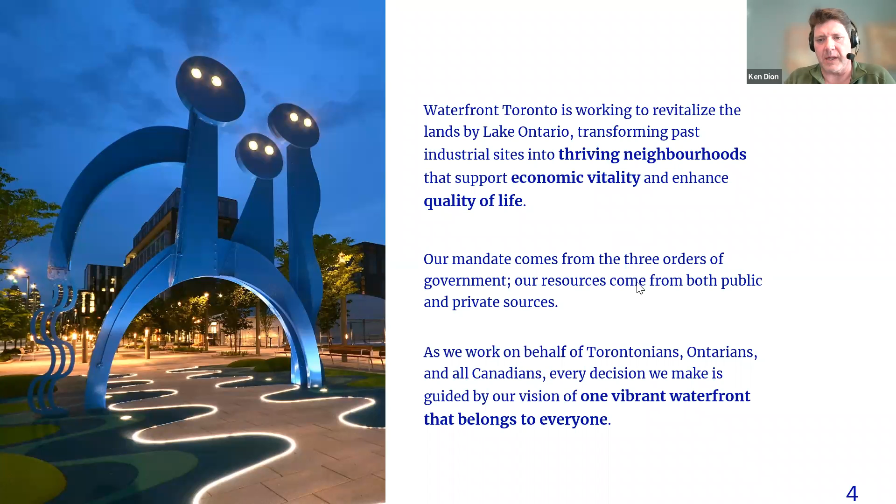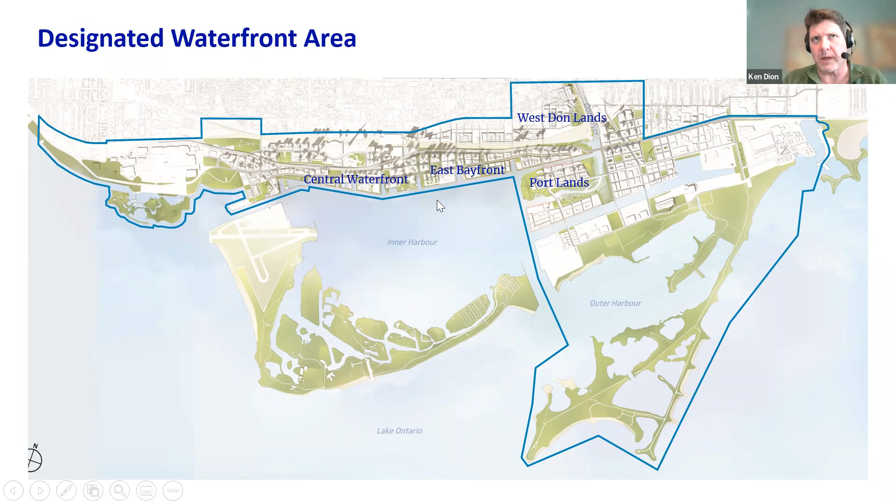We are working on behalf of Torontonians, Ontarians, and all Canadians to make a great, vibrant waterfront that belongs to everyone here in Toronto. This is our designated waterfront area. We also have a couple of projects working with TRC in the past, with Port Union and Mimico, but this is basically covering most of the inner harbor area, Portlands area, as well as going out to the west for the Toronto waterfront.

Some of the critical challenges and opportunities that Waterfront Toronto leads is looking to create sustainable, cutting-edge solutions to reduce carbon emissions, promote high quality of life, and basically to try to create healthy people living within the city. We are looking to create complete communities that address needs for housing, mobility, accessibility, connectivity, inclusivity. We try to create spectacular new destinations as part of our work, designed along vibrant cultural, recreational, ecological, civic, and public spaces.

And a core piece of our work involves extensive engagement with the public, stakeholders, First Nations, and developing a really integrated way to access the broader public.

We've had a significant amount of success. Over 2.5 million square feet of development has occurred, with over 2,600 market residential units. We have generated revenues to the government in the order of 1.6 billion, and created $4.1 billion worth of output to the Canadian economy. We've initiated $21 billion of total investment on the waterfront, as well as $2.6 billion development value attracted by Waterfront's first six projects in the area.

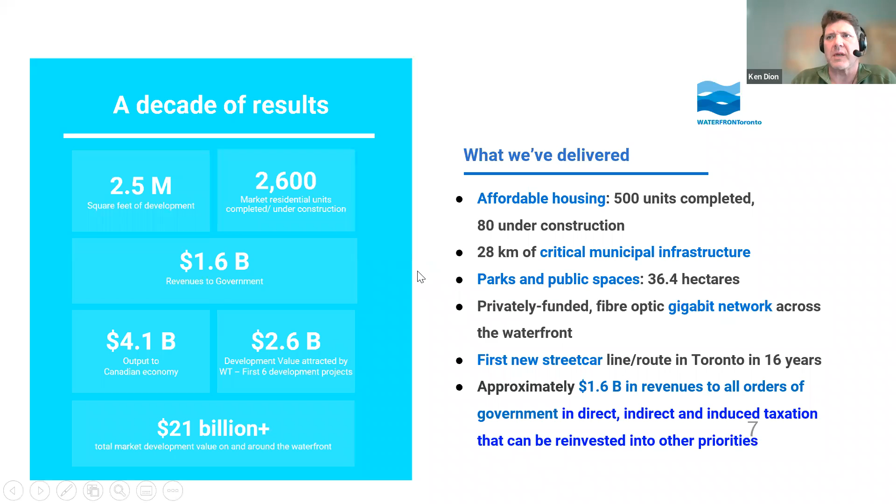So let's see if I can get this.

So getting into the project itself, the Portlands Flood Protection Project, project challenges and goal. We are located at the mouth of the Don watershed, which flows from the Oak Ridges Moraine down to Lake Ontario. It covers about 36,000 hectares, flowing 38 kilometers south, and is one of the most, if not the most, urbanized watersheds in Canada.

The project area is right at the mouth. The area in yellow is the location of our various project elements that we are in the process of implementing. You can see where the Don River comes underneath the Metrolinx GO train line, underneath the Gardiner ramps, Lakeshore Boulevard, before entering into the Keating Channel, which then does a hard right into the inner harbor of Toronto.

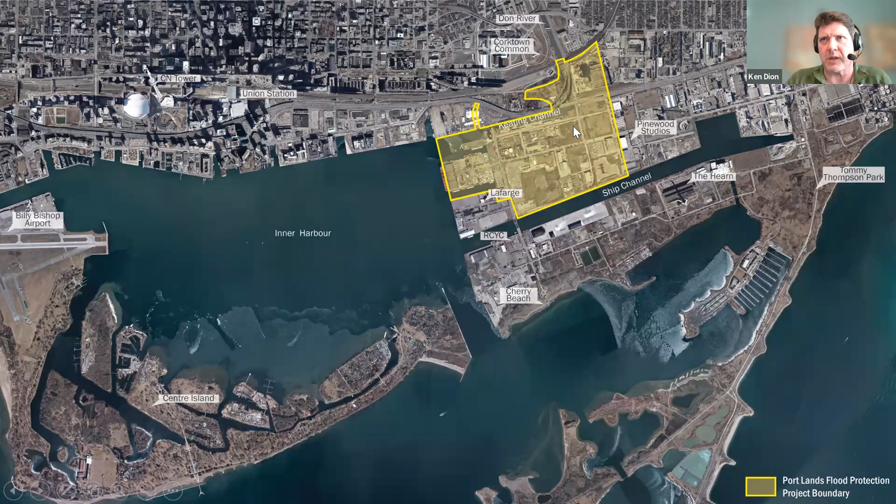So we are looking to provide major new flood protection and city building environmental enhancement works in this project area. Of course, this is not what has been here forever. This is all created lands that occurred over 110, 120 years ago. This was one of the larger coastal wetlands on Lake Ontario, Ashbridge's Bay Marsh.

And as an effort to address disease, when they had raw sewage being discharged into the wetlands and a lot of mosquito-borne disease, but also they wanted to create a whole new industrial port operations area at the time, extensive filling operations were undertaken over a period of 10, 15 years to transform the marshes into the Portlands that we see today.

Of course, it was not the environmental rules those days that we have now, and it was a significant amount of garbage and waste materials that was contributing to the creation of the land base at that time, creating a legacy of impacts.

After the Portlands were created, there was a significant—I apologize for the phone in the background.

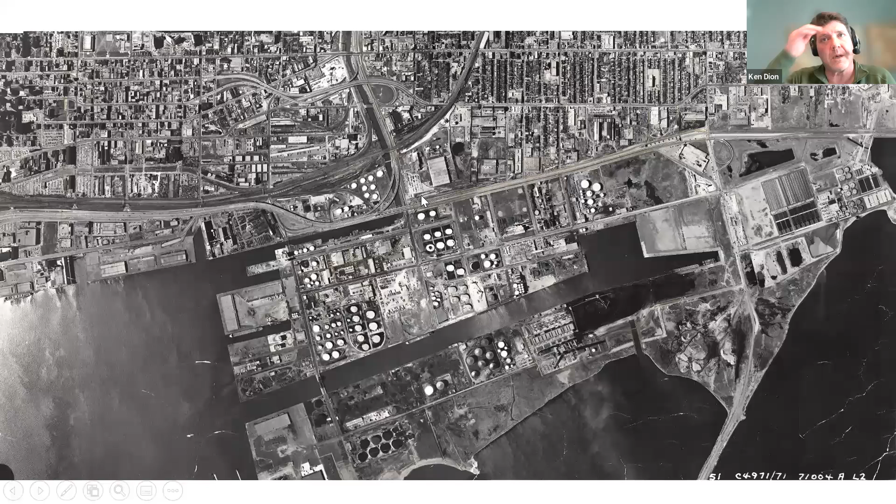You can see there's a legacy of industrial activities that occurred. Oil refinery was extensive in the area, and as were munitions production and tanneries, and a series of other activities that created significant further contamination to the soils that were placed in the Portlands in the day.

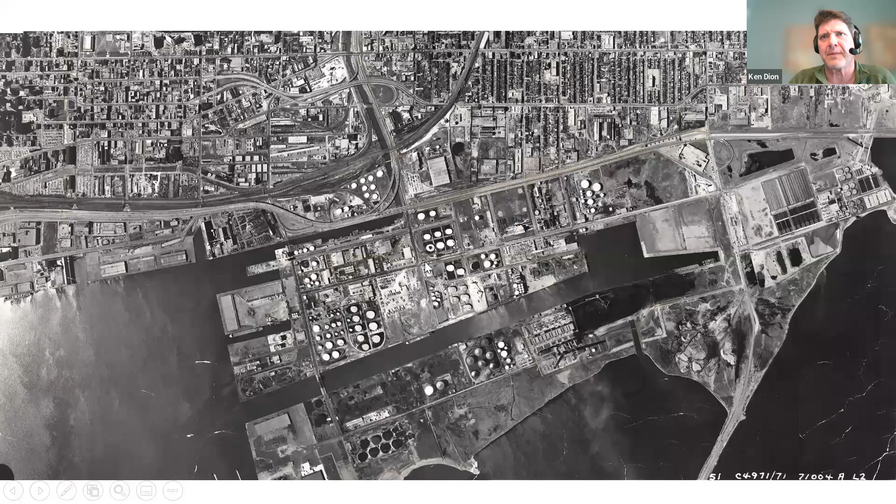And as a result of this lake filling activities, what happened was we ended up with a very low lying topography surrounding the Don River and Keating Channel that basically created a very flood vulnerable location within the broader surrounding area on the Toronto waterfront. What you see on the left was 210 hectares of flood vulnerable land that was originally on the west side of the Don River.

Flood protection works were completed between Waterfront Toronto, TRC, and the City of Toronto by 2012 through the West Don Lands and the lengthening of a railway bridge that actually eliminated the flood risk. We are now working to eliminate the remaining 290 hectares of flood risk that occurs to the east and south of the Don River through the implementation of the Portlands Flood Protection Project.

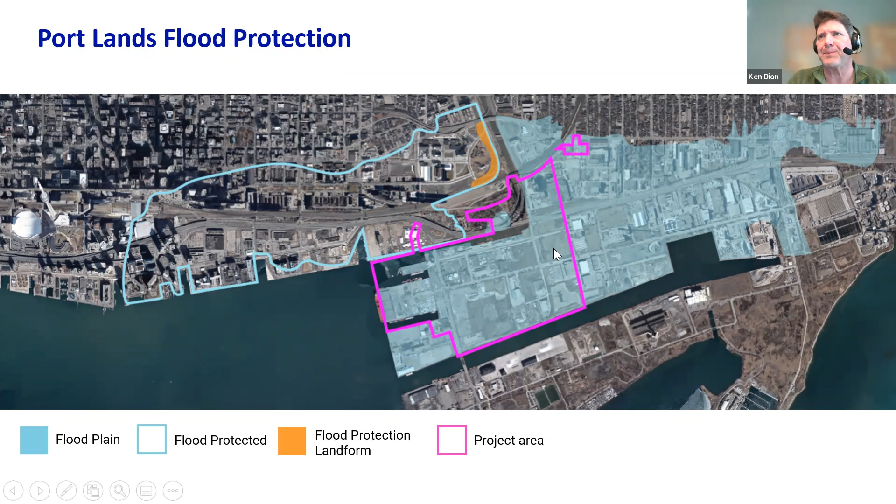So this is the more detailed sort of residual flooding, the flood risk that is expressed within this area, that will be addressed through the Portlands project.

We are dealing with regulatory storm flows, which in Ontario involves the highest flood on record, the largest volume of flooding that has occurred on record. For the Toronto area, Hurricane Hazel was the regulatory flood event, a massive flood event far larger than the 1-in-100-year storm event.

To give an idea of the range of flows we're dealing with, the Don River in a typical summer is around 2 to 4 cubic meters per second. The regulatory storm event we're trying to provide accommodation for is 1,572 cubic meters per second, so it's a much larger volume of water. The 100-year storm is about 500 cubic meters per second, to give you an idea of the quantities we're managing.

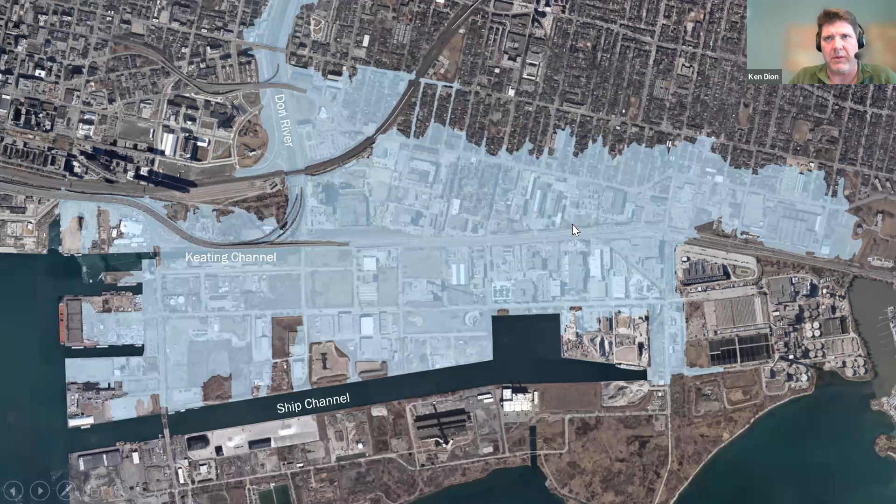Another major issue we're dealing with is the significant amount of sedimentation and debris in the Don. It's always been known as a very sediment-laden river. It comes through large bluffs upstream, and with industrialization and urbanization upstream, a significant amount of sediment and debris comes down. We're looking at 30 to 40,000 cubic meters of sediment deposited in the Keating Channel every year. That material won't disappear once we implement the project, so we have to continue an adaptive management approach for dealing with the sediment.

We get 600 to 800 tonnes of floating debris coming down from upstream, which is important to manage so we don't have impacts and conflicts with navigation in the inner harbor, and also because we're looking to create a very green and naturalized river mouth. We want to minimize the amount of refuse that gets trapped within our naturalized areas.

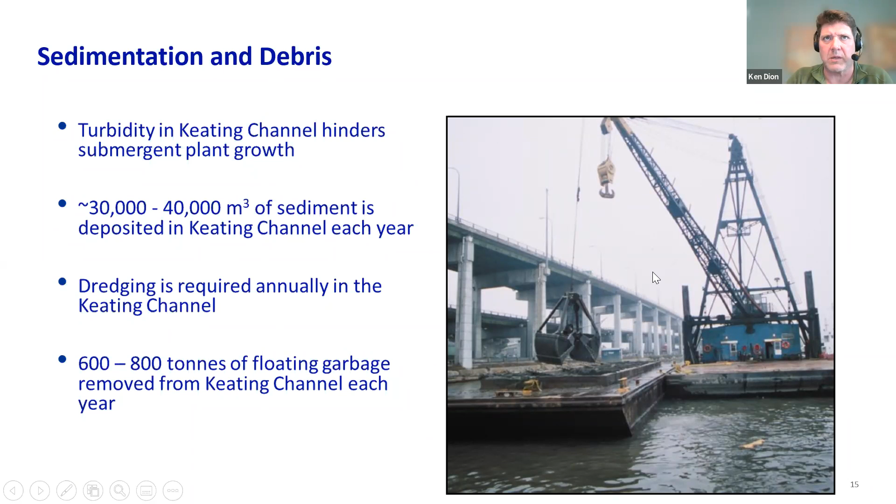The habitat conditions currently are very poor. It's all dock walls going several kilometers upstream. The Keating Channel has deep, uniform conditions, up to 6 to 7 meters deep, with very little structural habitat within the Keating Channel and Lower Don. There's essentially no riparian vegetation. As you can see in the foreground, given certain summer conditions, we can get poor water quality with low oxygen levels and high phosphorus, creating significant filamentous algae blooms. The fish communities and diversity of wildlife are quite low right around the Keating Channel itself.

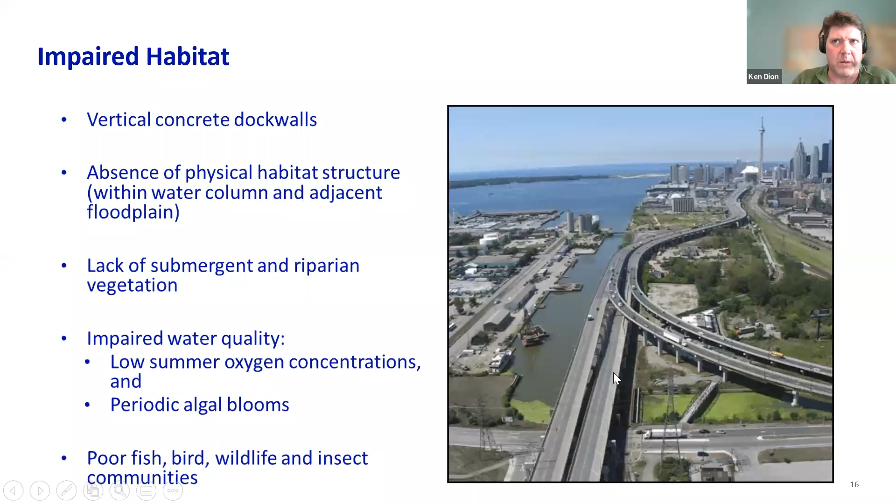So we undertook an environmental assessment, completed in 2015, which sought to select the best solution to create a naturalized river mouth while providing flood protection up to and above the regulatory storm event, within the context of being in Canada's largest city. We had to deal with existing infrastructure, existing land uses in the area, and plan for future revitalized, sustainable communities as well.

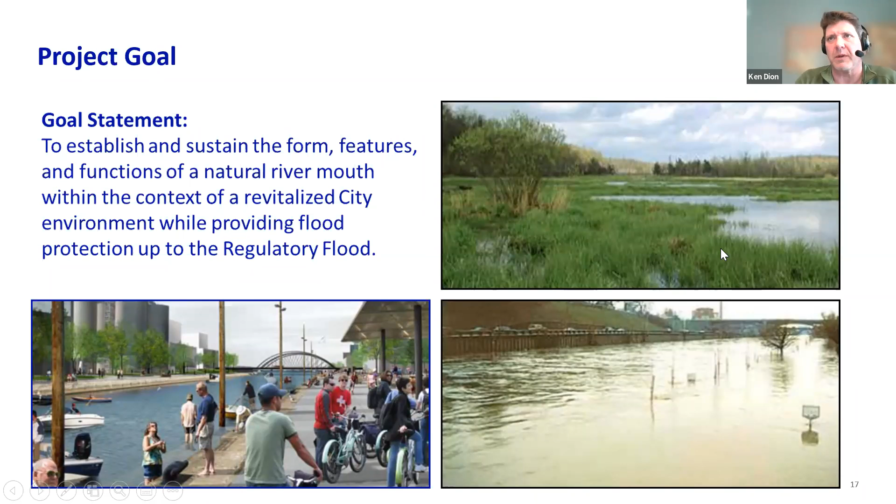Through the EA process, we create a new naturalized river mouth with 3 different outlets to allow floodwaters to find their way into Lake Ontario. We're keeping the Keating Channel, which is deep and wide and offers significant flood conveyance capacity. It also provides a great opportunity in a sustainable revitalized community for formalized public promenades that allow public access, cafes, and different opportunities for the public to experience the dock walls.

We're also creating, through a combination of cutting a new river valley system and raising the surrounding lands, a new naturalized meandering river system with associated wetlands behind the levees, and a whole network of trail systems allowing the public to experience nature in the river being created. This will take the base flow conditions most of the time. We're putting in a flow curtain at this location that diverts most of the base flows into the river, so fish know which way to move upstream during their migrations.

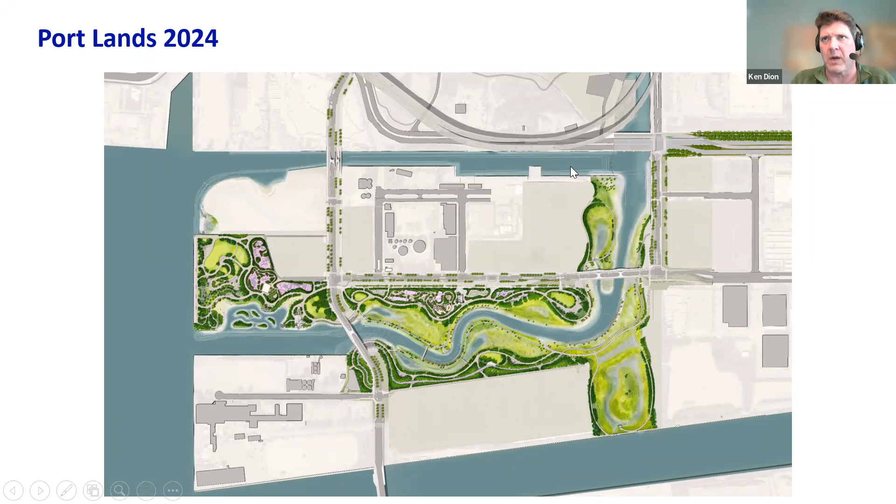To deal with sediment, we are creating a sediment trap north of Lakeshore. We have to widen and deepen the river north of Lakeshore to get underneath the Lakeshore bridges, and as soon as we do that, sediment deposits in that location. So we need a new system for dredging and removing sediment north of Lakeshore to retain conveyance capacity under the bridge. We are developing a detailed operational plan for managing sediment there as our primary location, rather than in the Keating Channel where it is currently undertaken.

What you see here is one project, but it consists of about 23 other major projects broken into various types of works.

We have park works, shown in green, creating areas of parks and open spaces. We also have bridges, shown in pink. We are creating islands as part of the new river design, so we have to install a whole series of new bridges, raising the grades leading to them on the surrounding lands and islands. This requires new roads and all the associated municipal servicing and infrastructure, along with the new river system itself.

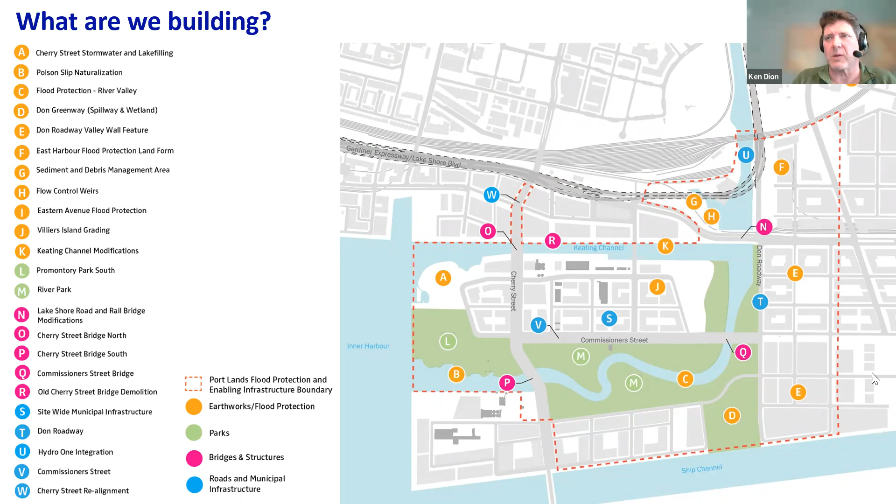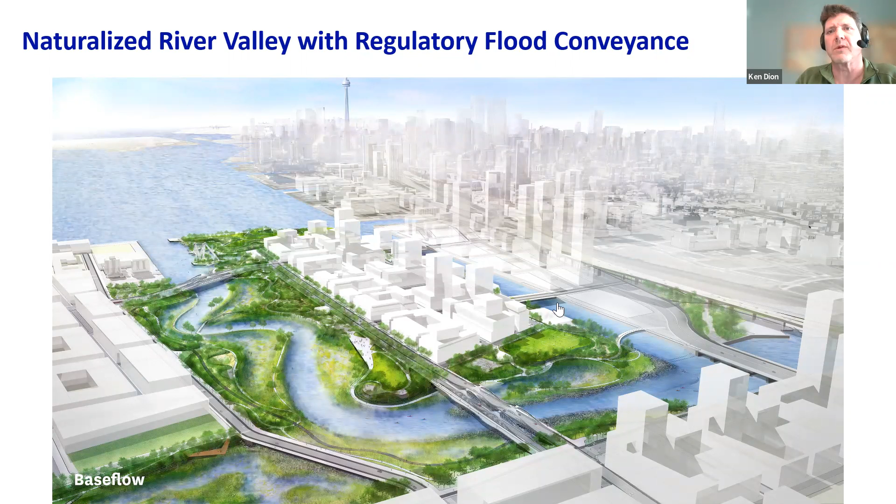We also have a series of marine structures, such as the sediment management area, flow curtains, and a flood protection landform along the Don Roadway south of Lakeshore, allowing us to contain and convey regulatory flows into the lake so they don't spill into surrounding future development areas. The idea is to have, most of the time, a green and blue naturalized river and wetland system. But under flood events, the water levels use the green infrastructure as the conveyance area, and as the flood hydrograph passes, we're left with the green spaces needing only relatively minor maintenance, like cleaning sand and debris off the park and river spaces, while still providing conveyance during a regulatory storm.

There are a lot of benefits from this project. It's a $1.3 billion project, but we're adding $5.1 billion in value to the Canadian economy, generating significant government revenue through direct and indirect development opportunities in the area. There's a lot of employment from the work itself and the subsequent development that will follow. We're looking to significantly increase the number of people living in the area, with a significant amount of affordable units. We're creating 11 hectares of parkland and 13 hectares of coastal wetlands, a huge increase in biodiversity and public green space, creating a new paradigm for sustainable and accessible communities.

Some technical challenges worth noting: this is a lake fill area that's heterogeneous, unconsolidated, and underlain by peats, making it very compressible, unstable, and contaminated. This created significant challenges in excavating a river valley essentially at Lake Ontario water levels with high groundwater conditions, in order to build a clean, green naturalized wetland on top.

So one of the things we had to do was create a lot of isolation, building a really big foundation and basement for the natural river system through heavy engineering processes, including a series of cutoff walls. These ensure our valley slopes never collapse into the future surrounding areas, and also allow us to excavate and dewater the river valley system while constructing in the dry. This let us create horizontal and vertical barriers against contaminants left behind in the future development blocks and beneath the river valley, so we're not creating pathways of contamination into the ecosystems.

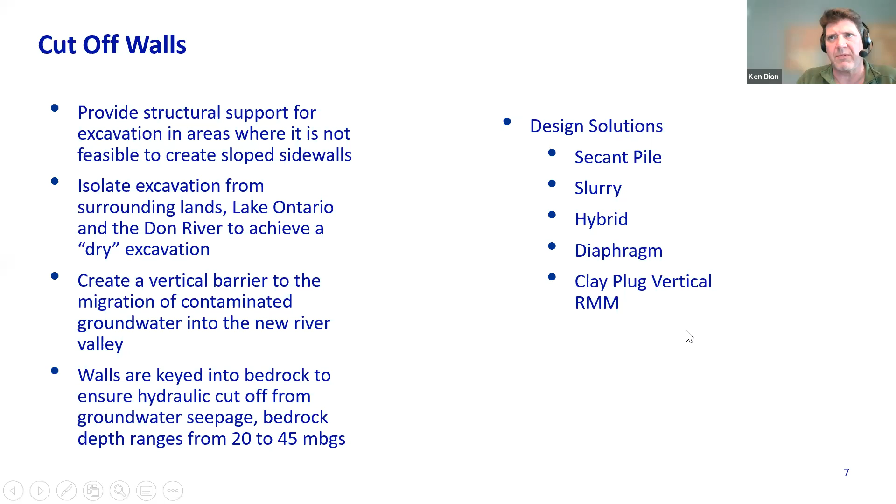We had different types of solutions: secant piles, slurry walls, a hybrid of slurry walls, and diaphragm walls incorporated into the overall design. Depending on the location, the physical conditions varied based on depth to bedrock, the complexity of the soils, and the importance of isolating structural components. We used various templates of these different reinforcement types depending on the geography of the project.

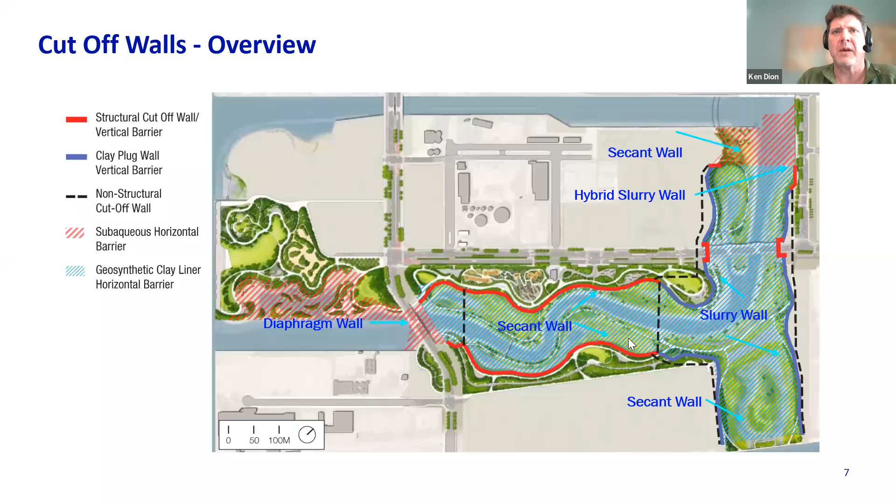One of the big ones, and some of the first work we did, was secant piles. These are basically 1.5 meter diameter vertical concrete piles that overlap by 25% on either side of each other, and every second secant pile has a steel H pile driven down to bedrock. These range from 20 to 45 meters in depth depending on where bedrock was. This allowed us to create an impervious barrier from the adjacent lands that aren't going to be part of the river, so contaminated groundwater can't migrate into the excavation site.

These were self-reinforcing walls that allowed us to drop the river valley by 8 or 9 meters inside, to remove the contaminated soils where we'll be creating the river valley system.

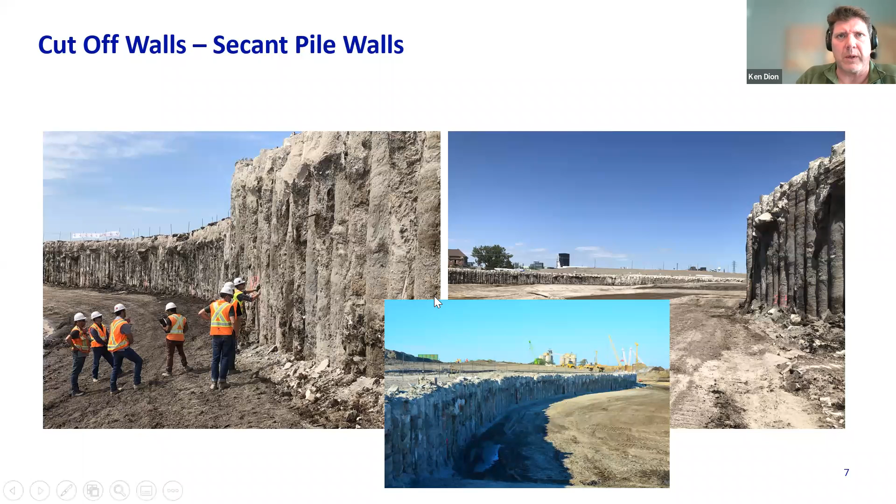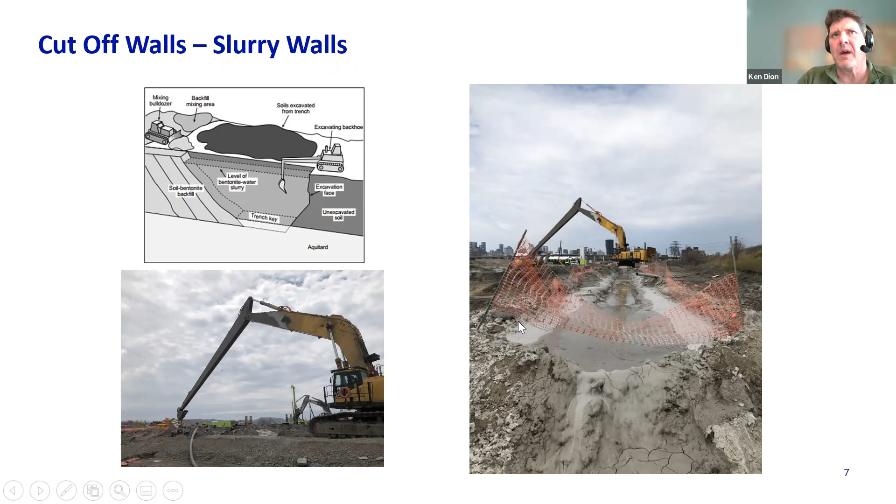In some other areas, we needed a temporary wall and barrier but didn't need a structural component. We used a technology called a slurry wall, which basically had a long-reach excavator digging a long trench. At the same time, we injected bentonite and concrete into the trench, and with the mixture of groundwater conditions and bentonite, it allowed us to create an impervious wall so we could dewater the excavated area where we didn't need structural integrity. That worked out quite well for us.

In some locations, we did the slurry wall but also needed a structural component, so we integrated it with a hybrid of steel H piles to give it some level of reinforcement to maintain the barriers.

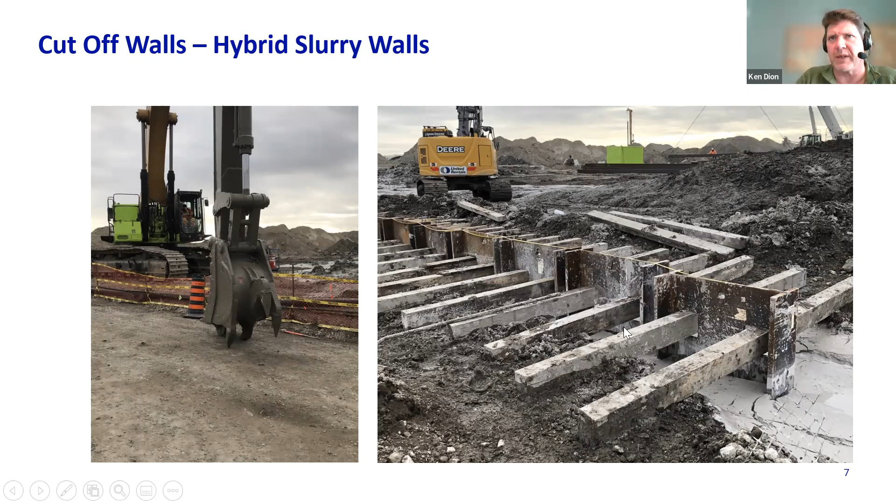A unique piece of work we had to do is where the river will be discharging, at the new naturalized area over at Polson Slip near Cherry Street—the site of the old T&T grocery store, if you know the Toronto Portlands area. This was unique: we needed to create a barrier that allowed us to excavate the river mouth in this location, but also excavate on the wet, lake side of it before doing the naturalization side, so we could put in a new bridge going into the slip.

So we needed a barrier able to withstand the loadings of the soils left to the east of it while we excavated to the west to allow for the bridge. But it also needed to be strong enough to withstand the loadings from the lake afterward, once we removed the soils to finish the excavation to the east, so it was a completely supporting structure.

We had an interesting piece of infrastructure equipment that came in and created a series of deep excavations where material was dug out. We placed in a steel cage reinforcement, then filled it with concrete to create the stability required for the different forces that will be exerted on it.

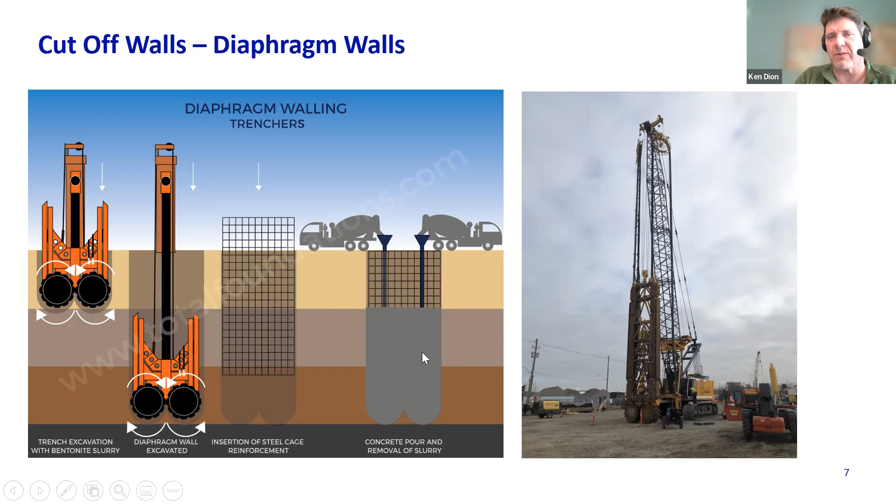When we're completed with this, and need to open up the river mouth entirely after the river has been finished, we'll bring in big diamond saws that will let us cut out chunks of the concrete and reinforced steel to provide that connection. Of course, we'd have to raise the water levels into the river first before opening it up, otherwise we'd get a flood wave of water from the lake entering in an uncontrolled fashion. So we need to create equilibrium there first.

Water management was important. Even though we were able to isolate the excavation, there's still a lot of water that comes up from local sources, from rainfall and snow, as well as seeping up through the bottom. So we needed to dewater and clean up the contaminated water before discharging it back into Lake Ontario.

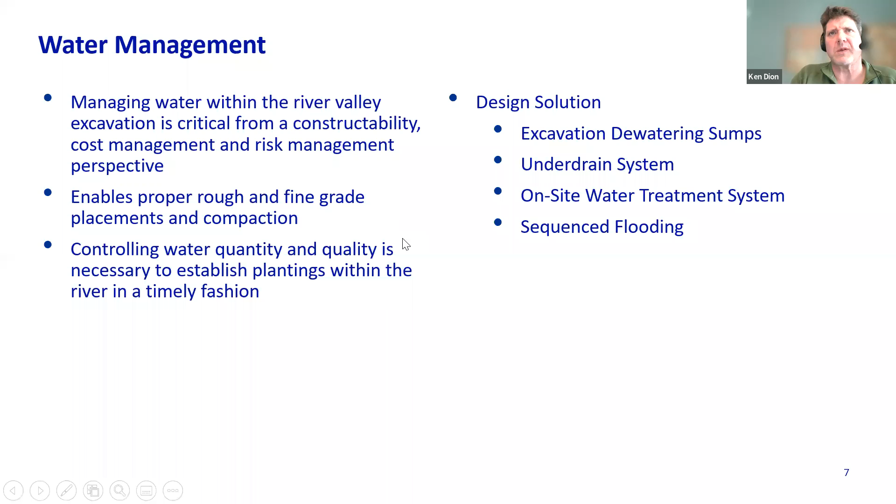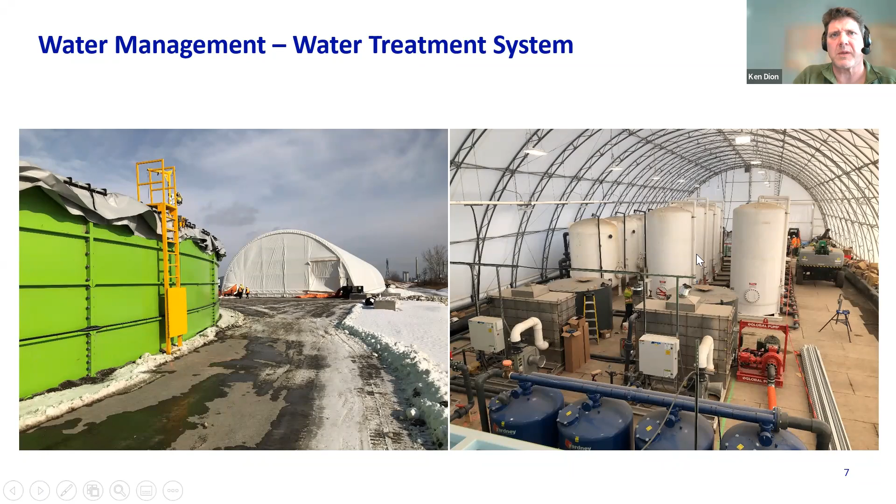So that dealt with the vertical barriers as well as the water treatment process. What we had to do as well was create a horizontal barrier. We had a series of risk management measures required to create a physical barrier between the remaining contaminated soils and groundwater below the river valley excavation area. Then we placed overlying fills for rough grading, and then finer soils for the various ecological units we wanted to bring in, as well as the components of the levees, the river valley, and the vegetation forming the overall program.

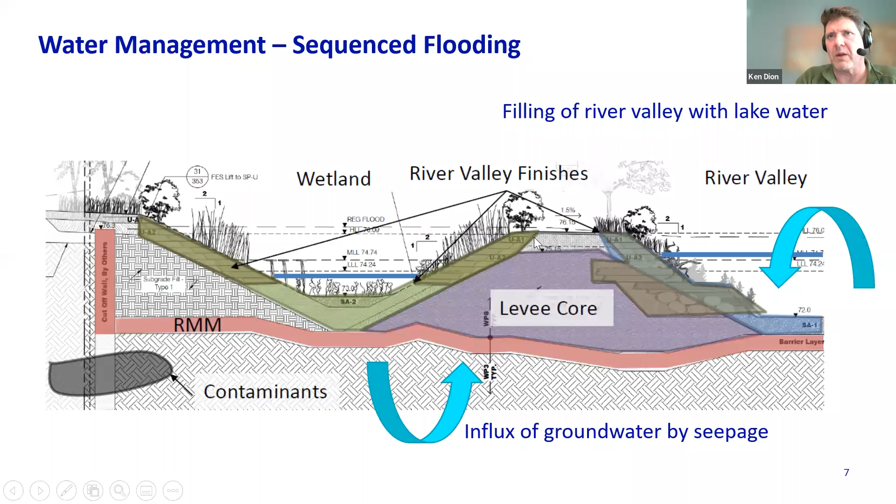So we do remove 1.5 million cubic meters as part of the excavation. It's all impacted, so we were looking to find ways to remediate or relocate for final use as much as possible, rather than disposing, digging, and dumping.

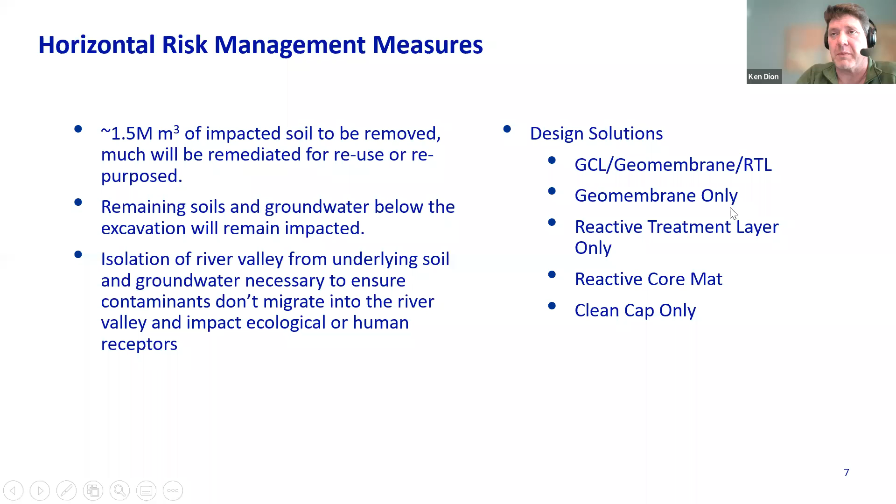We had the need to create a series of different solutions for the horizontal barriers before we start putting in the rough grading. You can see we had a series of different design solutions with GCLs, geomembranes, reactive treatment layers, reactive core mats, and clean caps, depending on the level of contamination of the groundwater and the soils within the area, as well as the expected range of shear stresses that would be exerted on the bed above under a major flood event. That will determine how much protection we needed to put in place.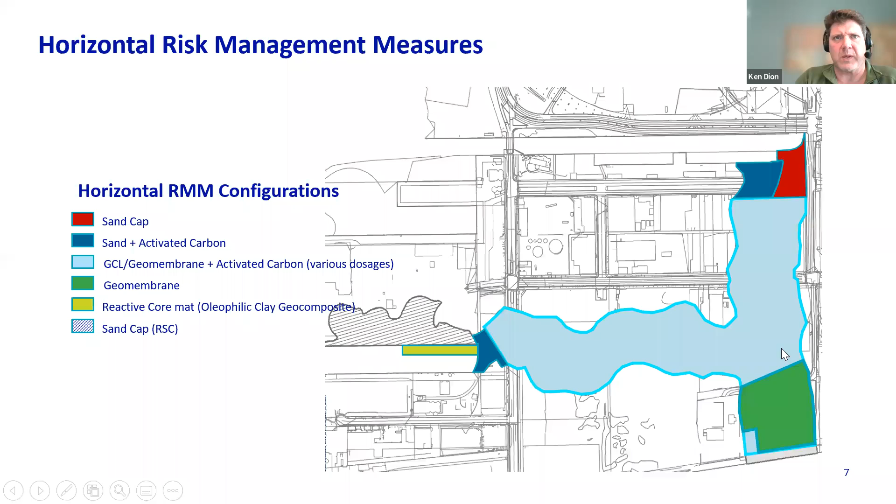So for the most part, the main part of the river valley had the most complicated GCL, geomembrane, and activated carbon treatments. Some of our cleaner areas, a new area we're creating called Canoe Cove, had much less contaminated soils, so we're just dealing with sand caps. And some areas we're just dealing with the geomembrane based on the anticipated conditions.

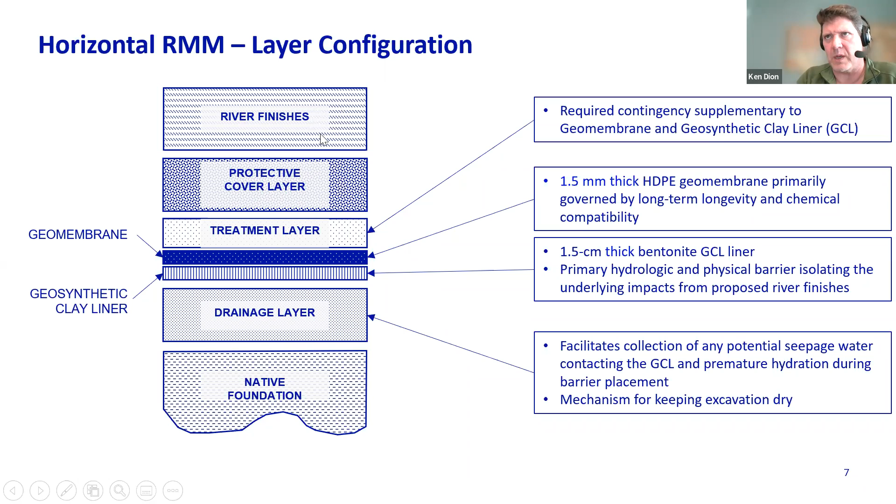So you can see how we would have the native foundation, then our drainage layer to facilitate seepage of water during the dewatering and maintenance process. Then we would come in with the geosynthetic clay liner, then the geomembrane, followed by an activated treatment layer. And then we'd have the various protective layers of rough grading and different materials that provide physical protection against scour, followed by our different soils, topsoils, and vegetation treatments of the naturalized area.

This gives you an idea of some of the geomembranes we were applying. We basically gift wrapped the entire underlie of the river valley system, and then overtopped it with the reactive layer to deal with any contaminants that might get through the underlying treatment layers before reaching the protective layers.

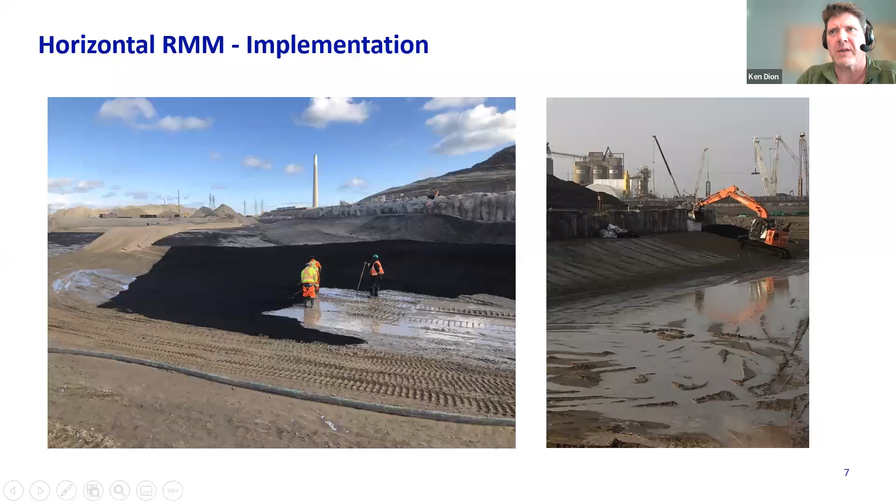As you can see, this was earlier last year, the main river valley excavation and the wetland areas and the various locations where the RMM, the risk management measures, are in progress.

How do you develop all this work? We had a very detailed risk assessment and characterization process undertaken using community-based risk assessment that allowed us to consider all the different properties within the Port Lands as a single site. It did allow us to characterize risks based on a property level, but allowed us to move soils from property to property based on like-for-like conditions within that area. So it provided quite a bit of flexibility to look at things comprehensively rather than a site-specific risk assessment, which would have been very challenging given the complexity of the multiple ownerships in the area.

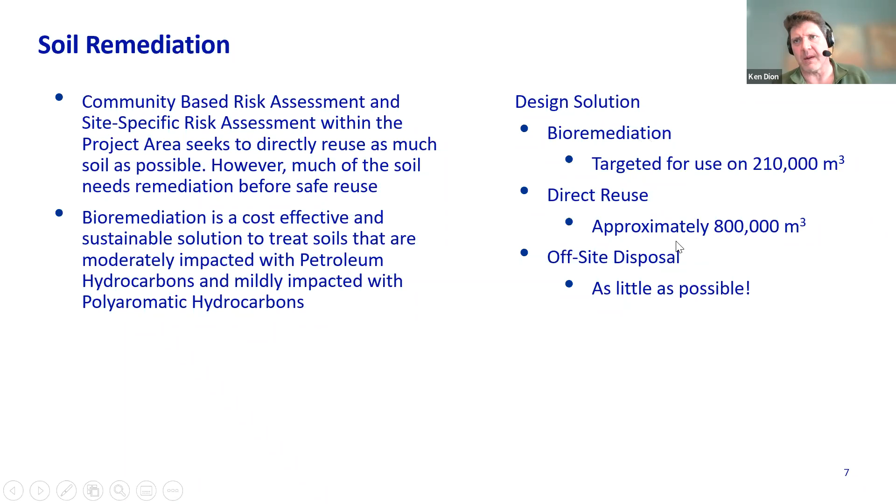We also ended up doing a lot of bioremediation on site with very long biopiles with additives to accelerate the breakdown of hydrocarbons that were within the soils. We were looking at 210,000 cubic meters through bioremediation. A lot of the soils we were able to move to future locations for direct placement, 800,000 cubic meters. And out of that, we do have a significant amount of offsite disposal still, but it greatly reduced compared to the 1.5 million cubic meters of soils being removed. A lot of that, of course, is rubble, refuse, contaminated peats that was not possible to reuse.

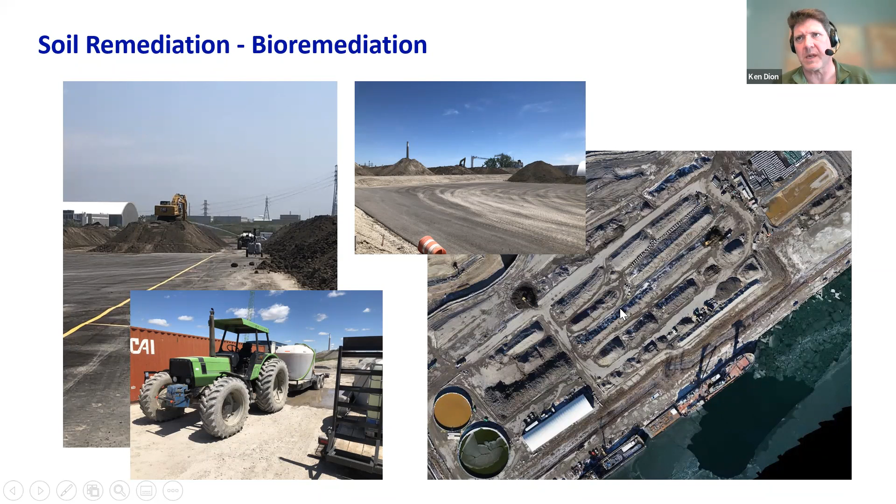So as you can see, this is the bioremediation. We created very long piles where we had excavators going out daily, turning the soils over, maximizing oxygenation with bacterial supplements to accelerate the breakdown of hydrocarbons for reused materials.

And of course, with the soils being heterogeneous fill, we had significant instability that we had to take into consideration. It was very geotechnically poor conditions, so we had a range of different approaches to deal with the geotechnical conditions.

We surcharged, basically put extra piles of dirt in areas to allow it to compress for a long period of time before we remove the extra material for the final grades. Where we didn't have the luxury of time, we created a foundation called rigid inclusions to underlie roads and other infrastructure, with caissons down to bedrock to support the weight of future municipal infrastructure.

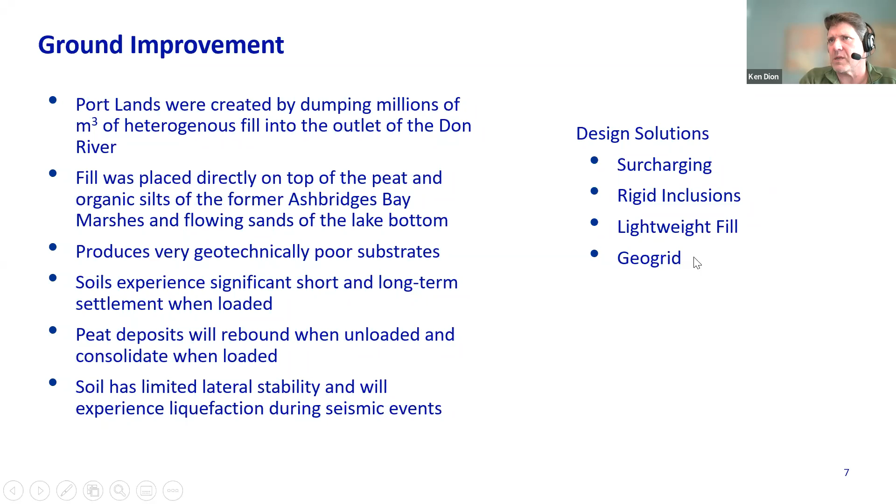We were able to find some lightweight fill materials, and geogrid were some of the other approaches we did for ground improvement within the area.

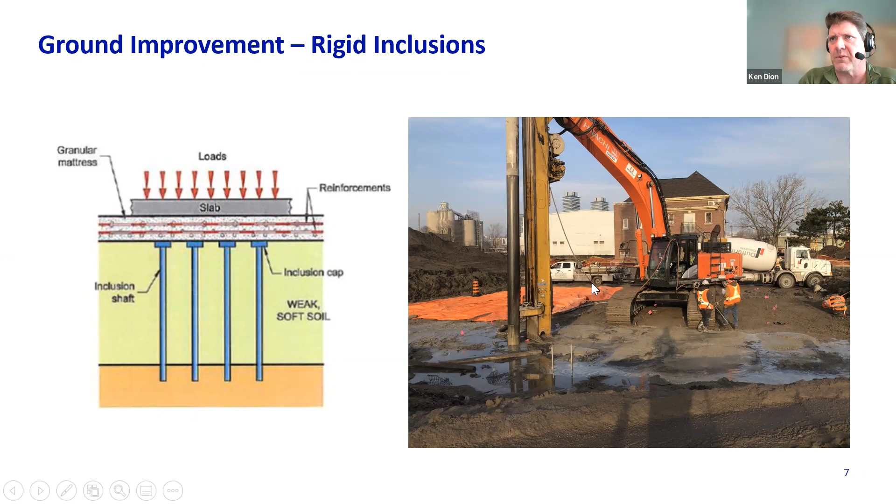This is an example of the rigid inclusions where we had a road bed. We basically put in piles down to bedrock with a reinforced concrete foundation supported by the piles, and then we were able to place the municipal infrastructure on top of that foundation. It is very expensive, but it was the only way to work within the timeframes that we had. We couldn't afford the extra year or so of settlement if we went through the surcharge approach.

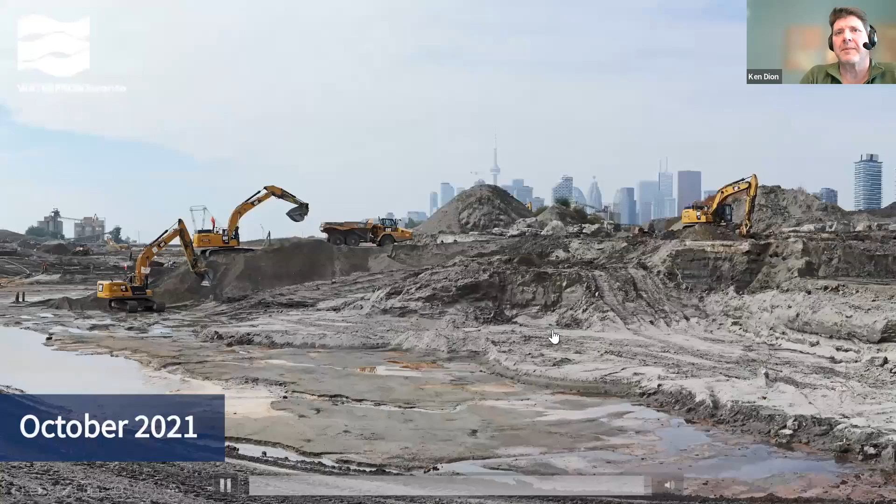Okay, so we're getting close to the end of the presentation, and we can take questions.

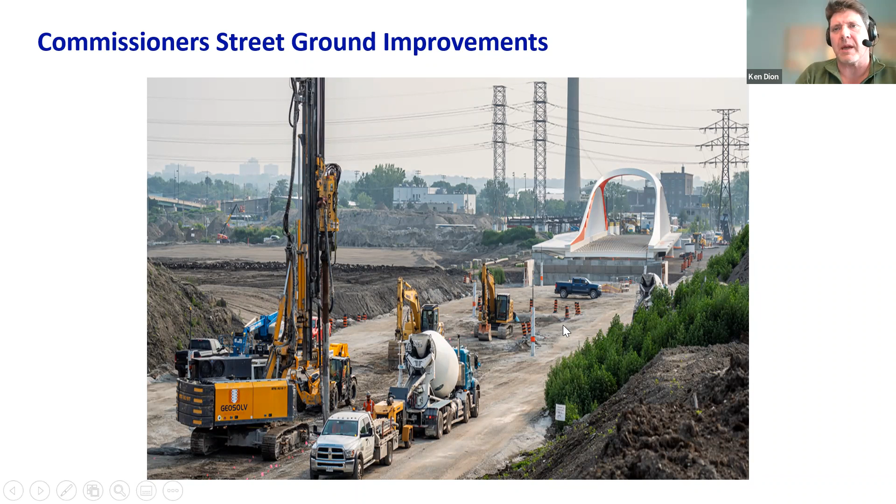Some other progress that wasn't included in the video: this gives you an idea of some of the ground improvement works where we're putting in the rigid inclusions for Commissioner Street, leading up to the Commissioners Street Bridge that came in last summer. And this is the two halves of the bridges that were brought in.

As you can see, there is an enclosed space that is required for the bridge operators to actually fuse the two bridges into a single unified structure. It is critical that we maintain climate and environmental conditions in which to allow that operation to work, so there are some very specific procedures required for the workers to access and undertake that activity.

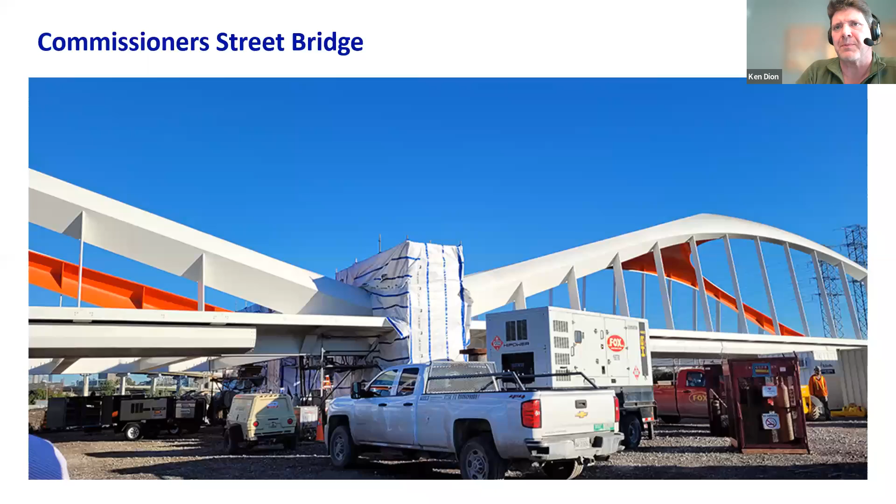Once that bridge is in operation and cars are on that bridge, we'll be able to close the existing Cherry Street, which is just to the east, and allow us to excavate the rest of the river up to the other side of the diaphragm wall, at which point we'll be able to cut that diaphragm wall and connect the Polson Slip with the main river outlet in the future.

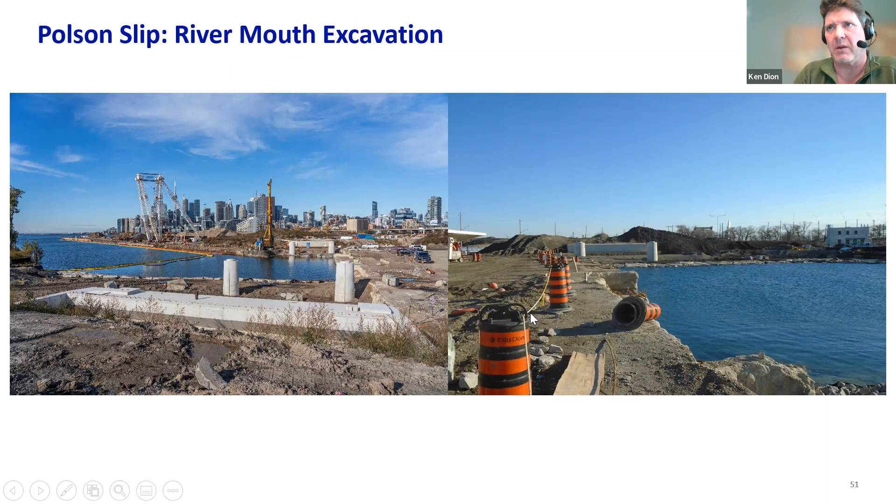And that's the new bridge that came in December for this location, and they're getting ready to put it onto the piers and abutments over the next little while.

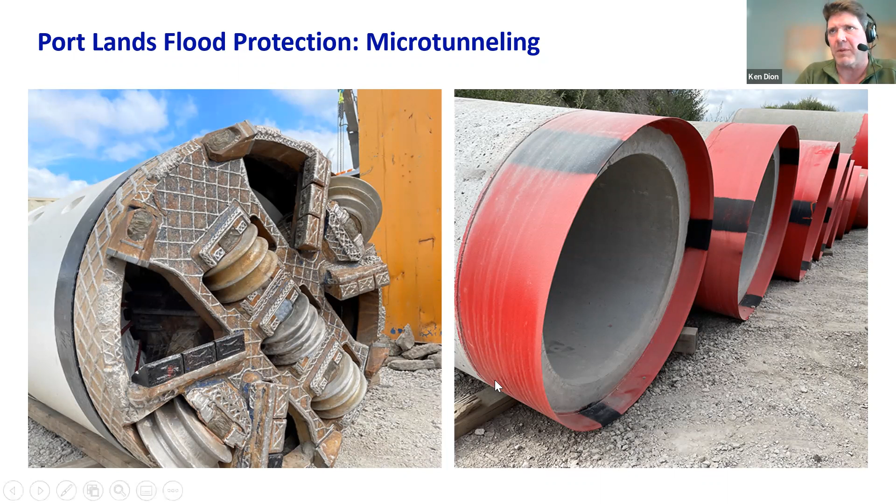We have a lot of infrastructure that's in construction with contaminated soils. We have to create dedicated conduits for infrastructure connecting to the islands below the RMM layers, so we're using a series of micro-tunneling. Basically it is non-excavation, and we won't be able to access that infrastructure through the river into the future. So if there is a need for repairs or replacements, it either needs to be done through the conduits or creation of new conduits to prevent pathways of contamination into the naturalized system in the future.

We talked about the relocation of the Heritage Fire Hall. That was a significant amount of work over a year and a half to be able to stabilize and move that structure safely.

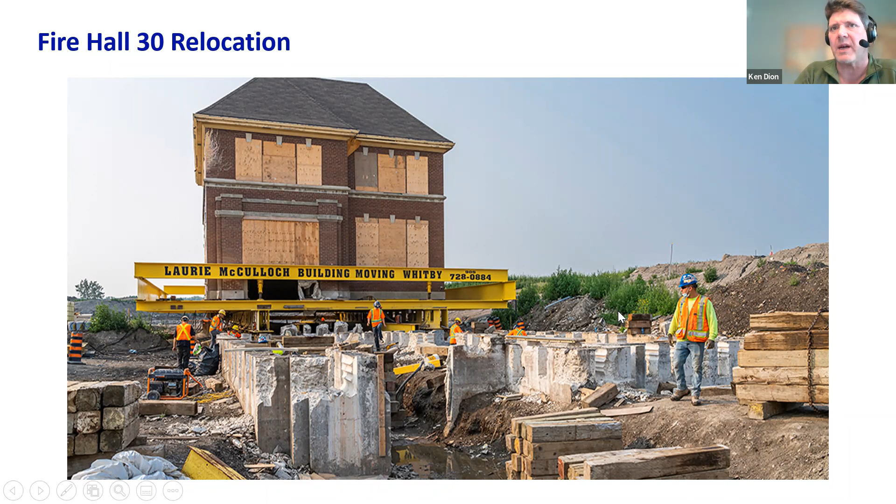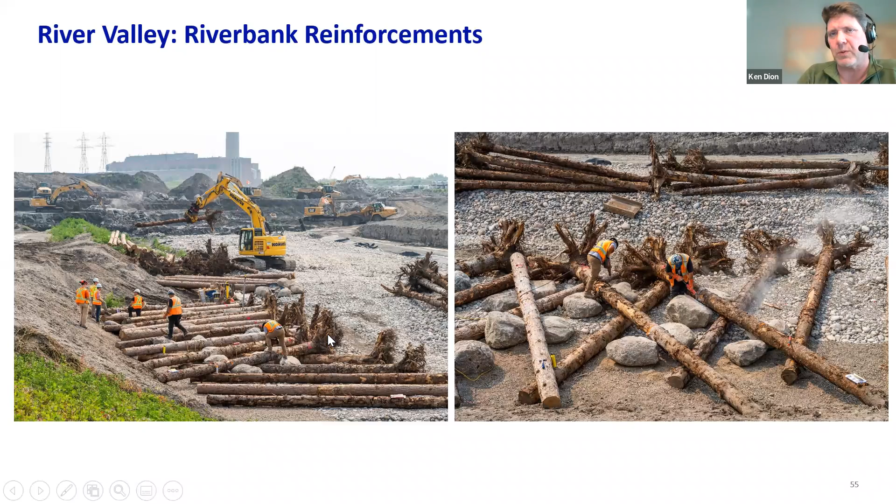And similarly with the levees, we're dealing with a series of coir fabric lifts, which are staked with live stakes and will be inoculated with vegetation. So these stakes and the coir fabric will actually provide stability for the levee until such time that the rooting masses of the vegetation takes over.

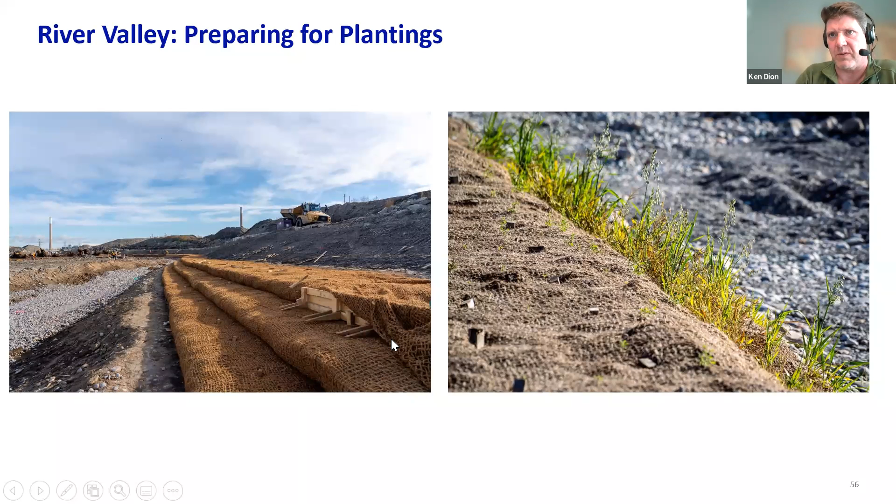You can see they're driving on rock. That's the actual riverbed, and that's the material that's going to be there once the river is flowing, but it does provide a good driveway to do operations from in the interim period.

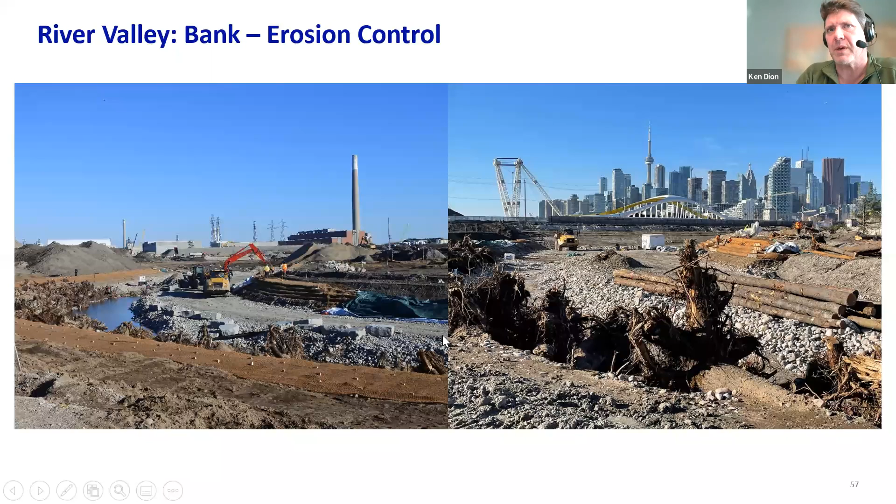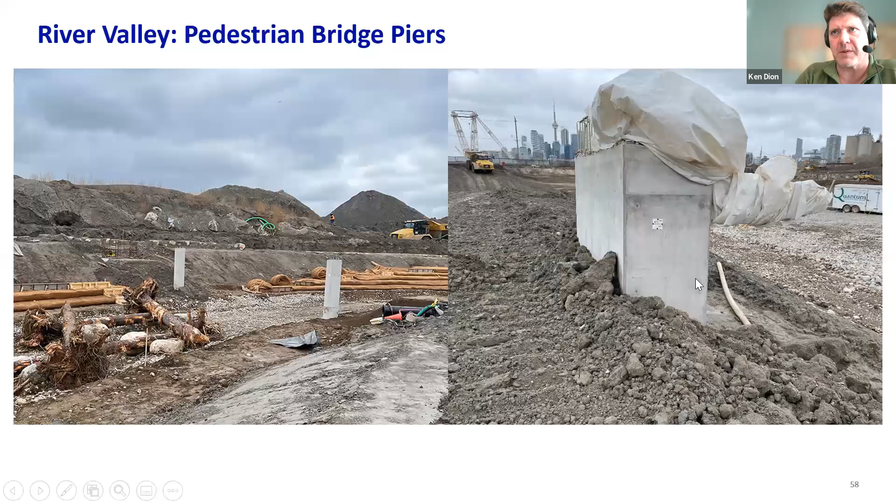And of course, we had to pre-install the foundations for the pedestrian bridges that will be crossing the river throughout the area. These are going down about 8-9 meters depth, so they are quite substantial structures for the pedestrian bridges in there.

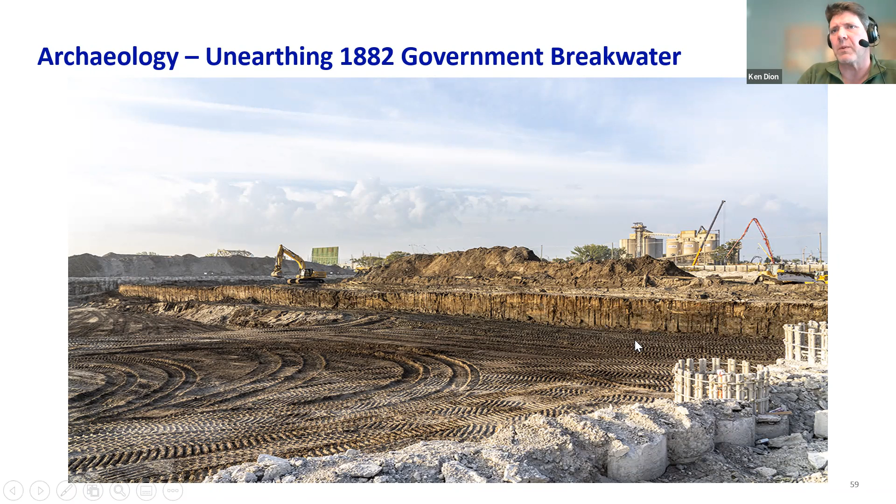We did unearth some interesting archaeology. The original 1882 government breakwater that formed the basis of the initial part of constructing the Portlands was unearthed as part of our excavation of the river. We had archaeologists on site, as well as partner First Nation Mississaugas of the Credit monitors, who undertook extensive topographic and material survey and recorded it for posterity before we removed it. There's some interesting video on our website that looks at the full process and history of the breakwater.

As I said, a lot of garbage was used to fill in. So as we were excavating the valley system, the archaeologists were recording a lot of the artifacts and materials coming out of the ground: bottles, newspapers, clothing. It was from the early 1900s, North America, underlying the entire Portlands area.

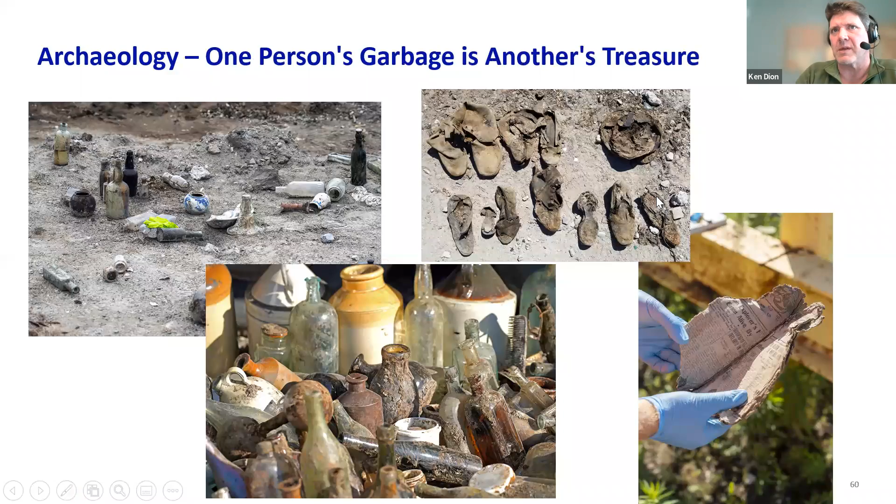Another unique thing that was coming up, we actually excavated down to one of the peat levels at the beginning of the summer last summer, and then we went to work somewhere else. By the end of the summer, with the rain that we had, we believe the seed bank from the original wetland from over 100 years ago began to germinate.

We actually had extensive amounts of river bulrush, cattails, and other wetland vegetation germinating from what we believe to be over 100-year-old seed. So we worked with TRCA, collected all those materials, stored them at a nearby location, and we'll be including these historic seedlings in our restoration plan when we get into the planting later this year.

Ironically, we didn't salvage them until after they went to seed this year as well. So not only did we get the actual seedlings, we got next year's crop from fresh seed germinated from the plants that grew in that location. So that was pretty exciting when that came about.

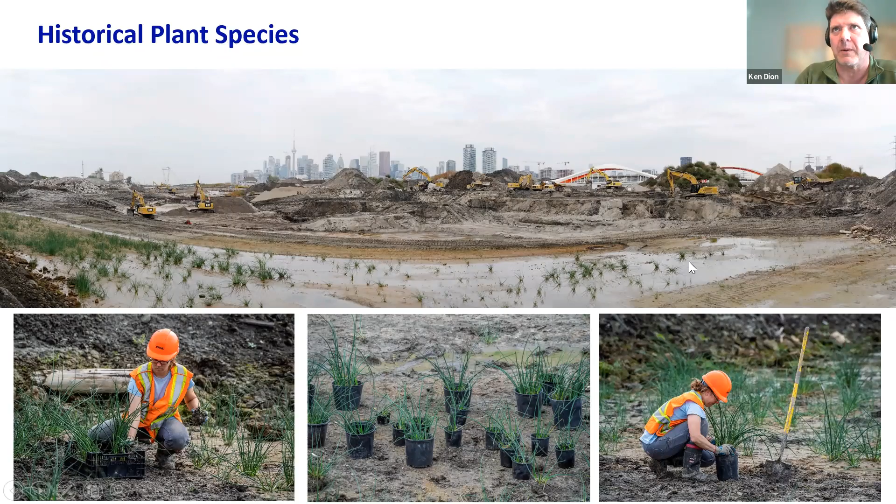As you can see, a heck of a lot of work has been underway with regards to the project. This concept for a naturalized mouth of the Don was first identified by the task force to Bring Back the Don back in 1989-91. The EA formally started in 2006 and was completed in 2015 for the river itself.

We undertook in 2016 a due diligence study that took the river EA and combined it with the municipal class EA that was undertaken in parallel, so that we could merge the two different EAs into a single project with a single scope, schedule, and budget. Construction commenced in 2018.

We are now currently just approaching the spring of 2022, with most of the excavation completed. We plan to have some of the roads open this summer to allow us to finish some of the other excavation pieces where existing roads are located in the valley area.

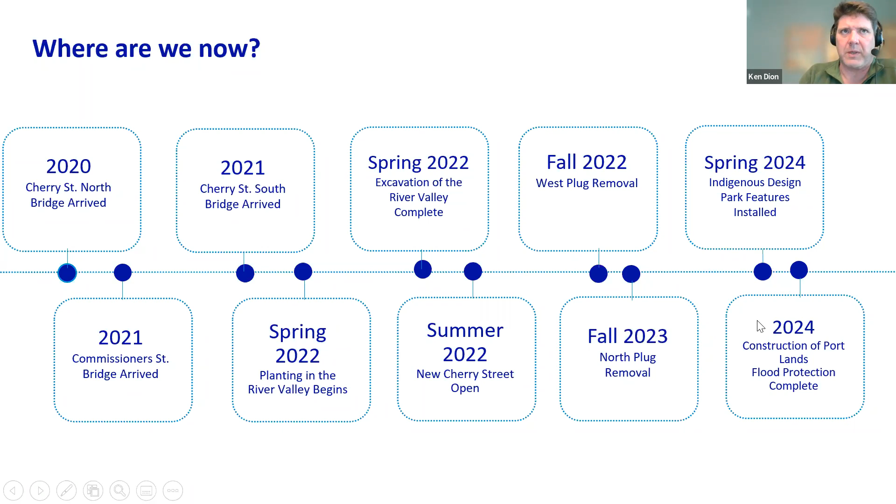We are looking to do a lot of planting throughout 2022 and 2023, and we're looking to actually have the river flowing by the end of 2023, with completion of the project in 2024. Once the river is complete, it does allow a whole suite of future revitalized community development to proceed.

Villiers Island is one of the primary beneficiaries, which allows a whole new mixed-use community to move forward with development plans and implementation. Keating Channel Precinct to the north.

We have, of course, Quayside work, which you probably heard in the news recently, with the reissuance and the selection of a development team to work with Waterfront Toronto to advance Quayside. And then, of course, we have the McCleary district, a bunch of film studio areas, a warehouse district, and also Cadillac Fairview's East Harbour precinct planning, which we are working on with them and the city and Metrolinx for a broader project planning initiative in that location, which is also contributing to the flood protection of the overall program.